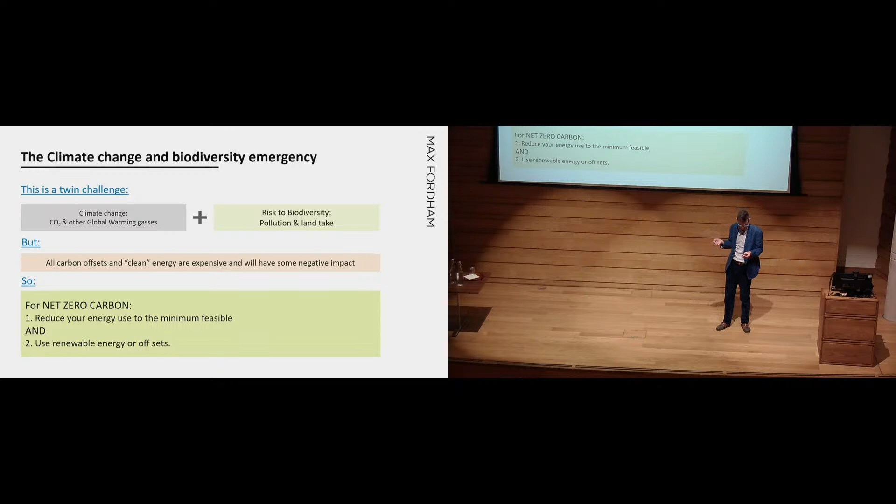So it's very important to think first in terms of a net zero carbon agenda. First of all, you really must reduce your energy usage to the minimum that is feasible, and then use renewable energy or offsets to consume the energy that you need to carry out your business.

So Wolfson's response to the climate change emergency. First of all, let's measure how much energy the buildings are using. We've got the blue bar at the top is how much electricity is being used, and it's a sizable amount, but it's not the biggest.

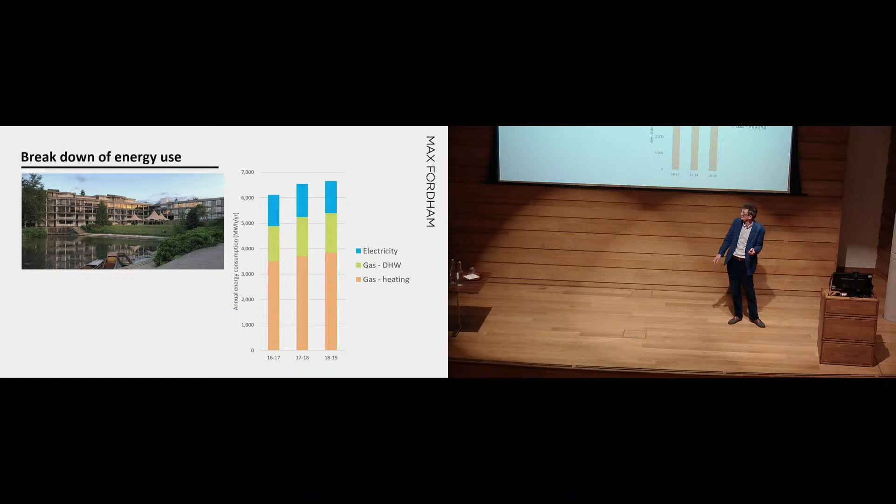The next two bars, two elements of the bars are gas for hot water production, and the grey bar at the bottom, the brown bar at the bottom is heat, which is by far the biggest element. Which is not surprising given that it's basically a glass and concrete, very elegant box.

Now, the carbon context is where carbon and energy interrelate with one another. The units up the side are how many kilograms of carbon are emitted for every kilowatt hour of energy produced.

Gas is a constant due to the chemistry of burning methane, which is CH4, whereas electricity can be made in a variety of ways. In the past, it was used by burning coal. The rapid fall in the carbon intensity on the blue line is the decommissioning of coal-fired power stations.

And going on to 2050, this is the government's projection of how much electricity is going to emit in carbon. And it's reducing due to the onset of more use of renewables and nuclear power and things like that. So you can see that right now, electricity is becoming greener, if you like, than gas. And that's where this is going.

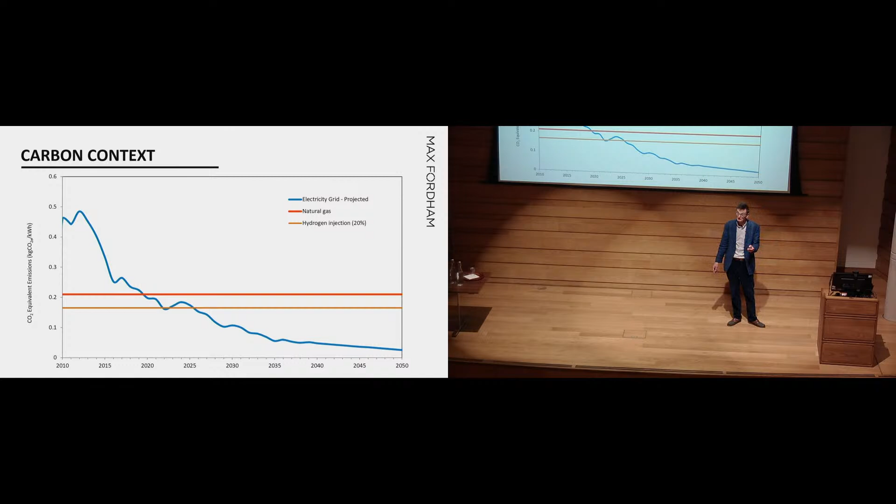This is the agenda we're going for. So our agenda, our brief for Wolfson and for decarbonisation generally, is to reduce heating loads, reducing the hot water loads, that's the water used to wash your hands, if possible, and to move from gas to electricity as your energy source. But this should be done at minimum cost, and to do that, we were looking to reuse as much of the existing infrastructure as possible, so nothing is wasted.

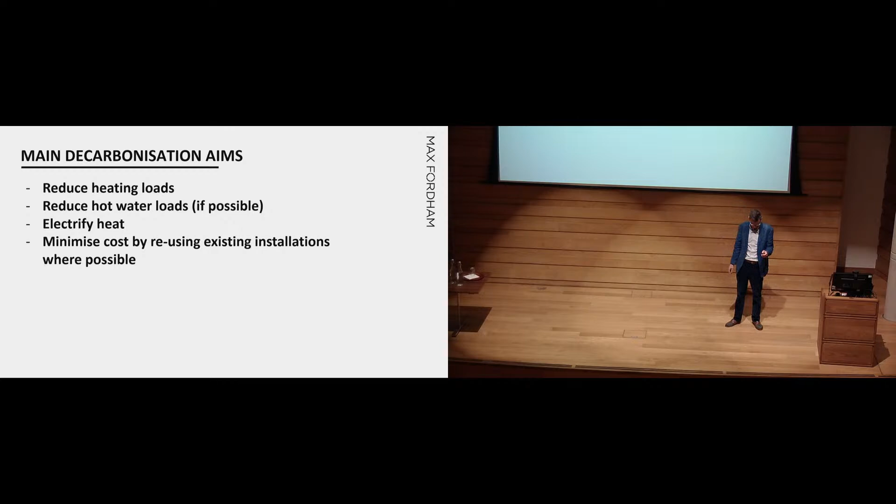So get rid of the gas.

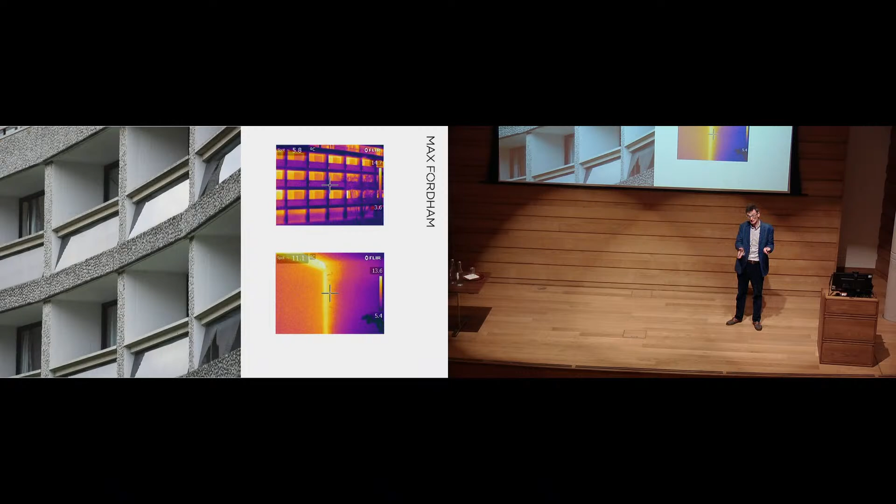That's the before. You've all been in buildings, in rooms which have got single glazed original windows, which are a little bit leaky, and it loses a lot of heat, basically. So I don't need to tell you anything about that. But you're kept warm with a gas supply that burns gas in some boilers.

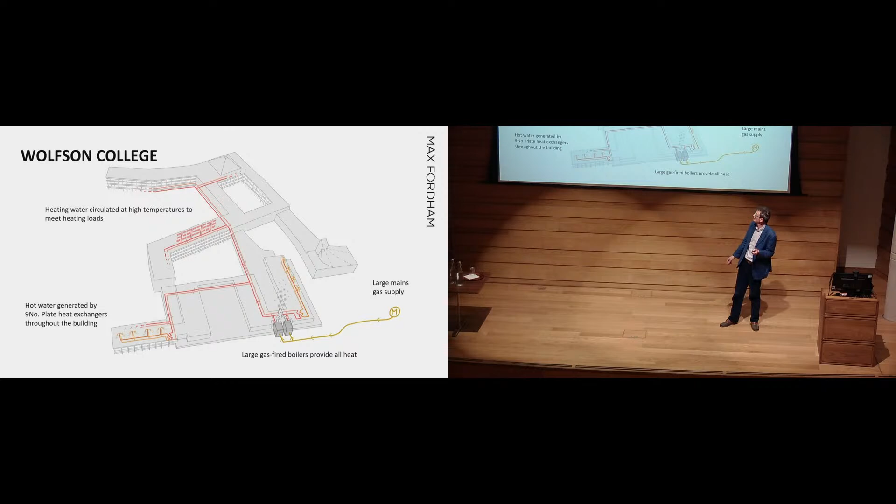Which push hot water around the building and into radiators in all your rooms. So the first step that we took was to analyze where the heat is going to keep you warm. This is assuming that everyone's at a nice temperature in their room. Where does that heat go?

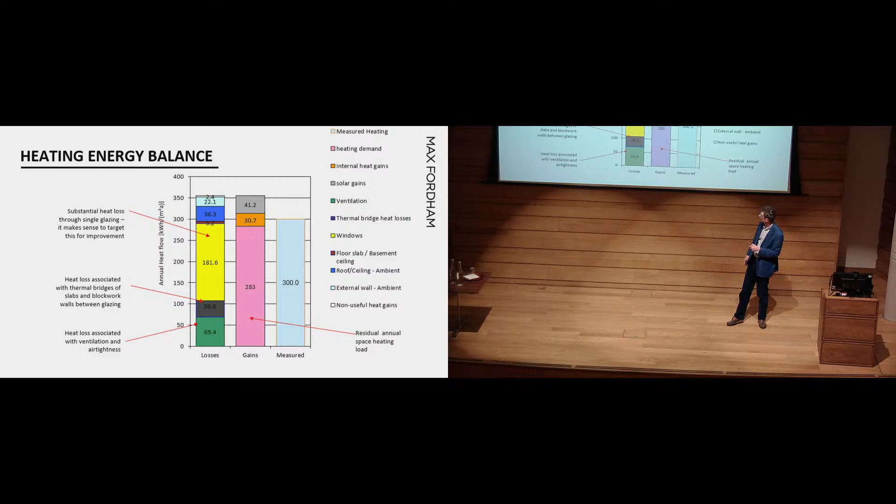The bar here, which is split into several colors, is a breakdown of where that energy goes. The lion's share of it is through the windows themselves, but also the heat loss associated with the windows are also considerable. This is the amount of heat that's lost around the edges of the glazing, through the walls and the concrete on the ceiling and the floor, which isn't necessarily through the window itself, but it's around the edges. And this part is to do with the ventilation because the windows are leaky.

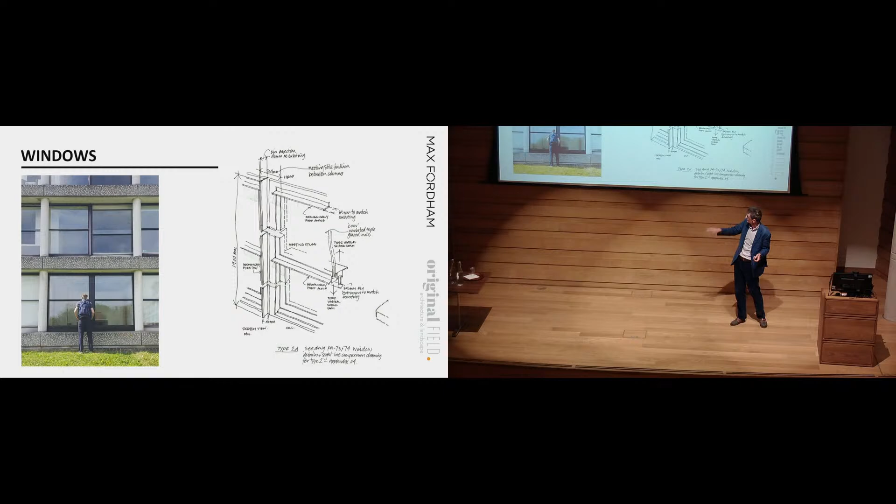Andrew's going to be talking in more detail about how the windows came to be, what the choice of windows that we got at the moment. So that will come on after me. But just a brief outline of what the fabric's about.

This is the current situation where you've got single glazing here, and these are solid blockwork walls here, and you've got a concrete floor here, and heat can not only go through the glass, it can scoot around the edge of the glass and the window frame, and quite a lot of heat is lost through that. So if you're going to change the windows here, you also need to change the frame that it sits in and all the building around it.

So we've insulated the walls coming back to prevent the heat scooting around the edges of our nice new windows.

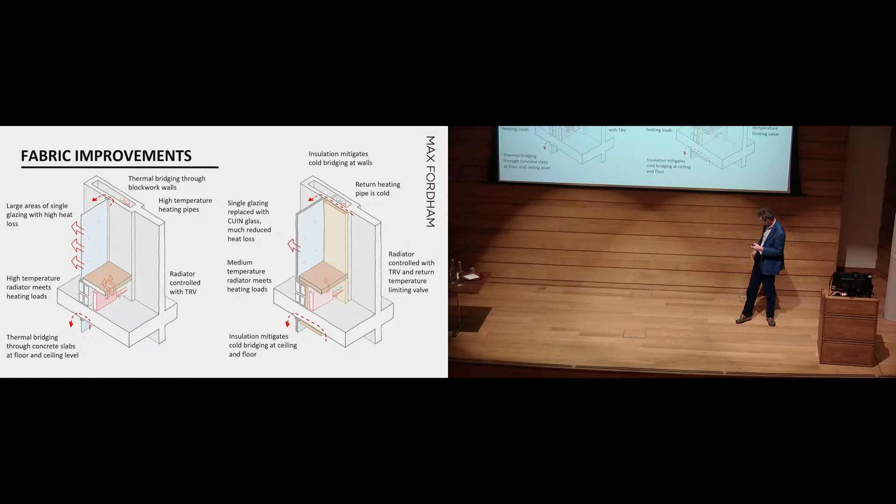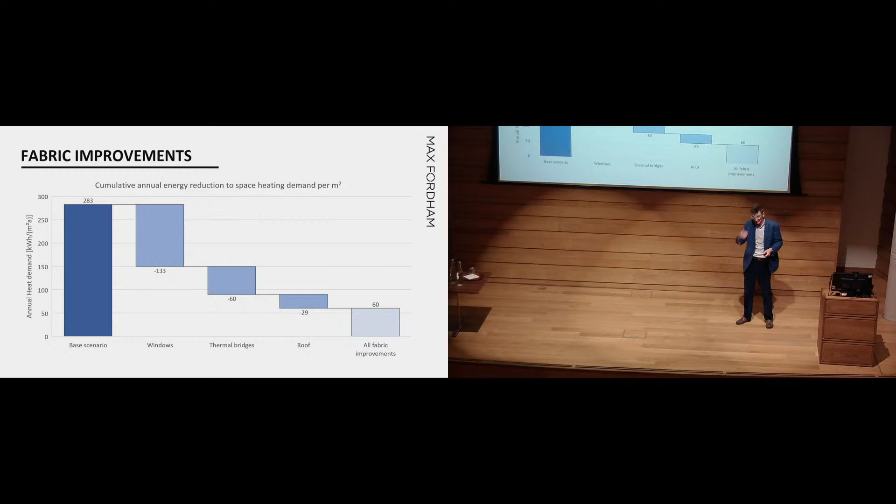This is a cascade, a waterfall diagram of where those heat savings are taking place. The baseline scenario is here, giving us 283 kilowatt hours of heat per meter squared per year. That's what we need to put in to keep the building in its uninsulated state warm. We insulate the windows, and that takes off nearly 50%. Then the thermal bridges, which is the term for going around the edges. And then you've got the roof, which is a bit more, and you've got down to about 20% of the original heat loss. So, very good.

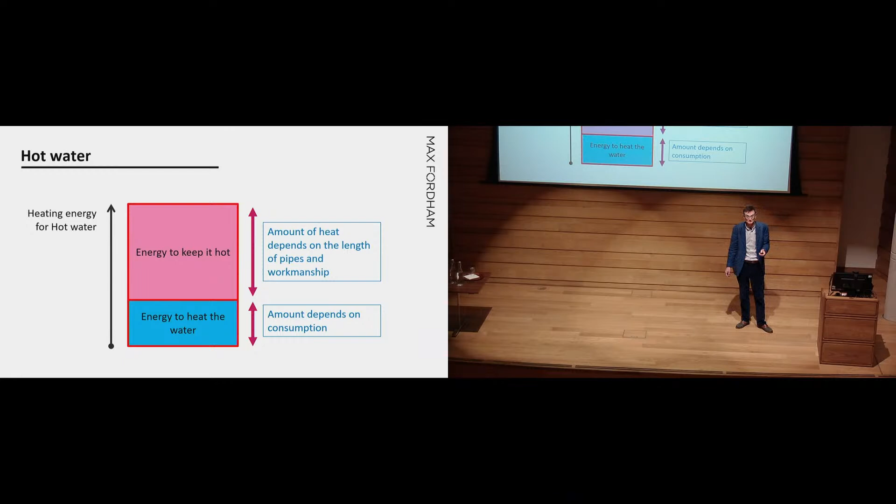As far as the hot water is concerned, it's a different story. It's not so easy to deal with that because of the geography and the layout of the building. The amount of heat that you need to heat the water that comes out of the taps is actually quite a small proportion of the heating required for the hot water. Most of it is used keeping the hot water warm as it's servicing the different taps around the building. And there are things that we can do to reduce that, but it is not as dramatic as the fabric of the main heating load.

So now, moving on away from the fabric and the heat losses and onto how we are producing the heat. Currently, it's using gas. So, as a review of how to deliver a unit of heat, doesn't really matter what that unit is, it's just one unit of heat. You can burn some gas. You would need 1.2 units of gas. 20% of the gas would be wasted, or the heat from it would be wasted up the flue and losses in the boilers and things like that.

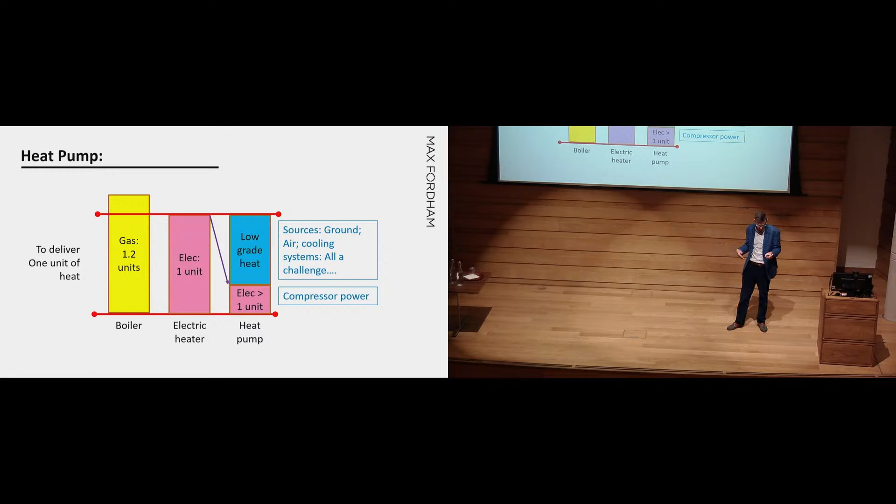You could use an electric fire, and all of the electricity would go into heat. There's no losses. Or you can use a heat pump. Now, a heat pump is a particular technology. It's the same as used in the fridge and things like that, where you take heat from a low temperature source and pump it up to a high temperature where in our case, it's useful. The electricity is needed to drive a compressor, and you need a source of low-grade heat that feeds the heat pump system. That's a quick schematic of what a heat pump looks like.

You've got the electrical power coming in to drive a compressor that takes low temperature, low pressure gas here, compresses it so it's hot. The heat is taken out of that high temperature and pushed around the existing radiator system. It comes round through the condenser, except this isn't a condenser, I'll come on to that. But then it turns into a liquid, low temperature liquid, where it uses low-grade heat to boil off and collect the heat from the low-grade source, and the circuit continues.

This is quite an important aspect of what we're doing at Wolfson. We're using CO2 as the refrigerant, the fluid going around here. CO2, ironically, has a very low global warming potential compared to other refrigerants available. CO2 has a GWP of 1, while other heat pump refrigerants range anything from 600 up to 2,500.

So it is a very green refrigerant. The other aspect is that it doesn't actually condense in the condenser. It comes in as a high-pressure gas, very hot, and leaves as a low-temperature gas. To get the heat out of it, you need to cool it down over a wide temperature difference. So it can produce water at the high temperatures the boiler produces, but to be efficient it needs water coming back at 30 degrees or so. A lot of the work and thinking in this project went into how to do that with the existing heating system.

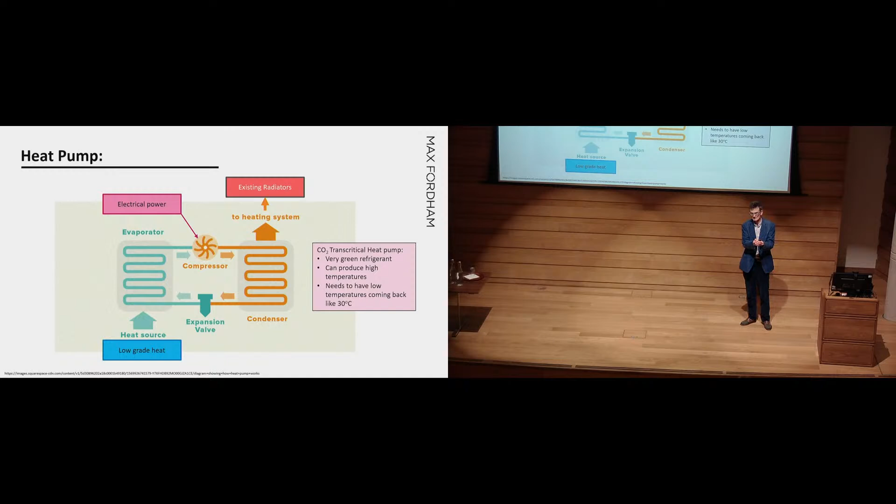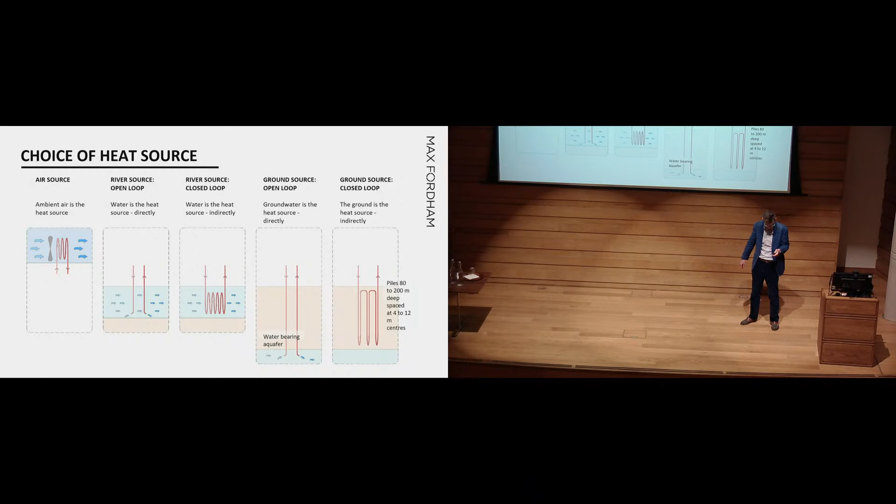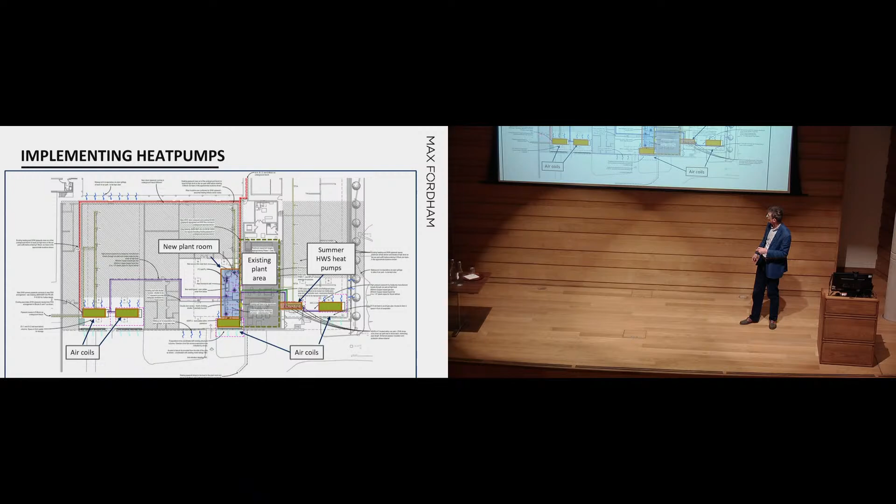So the choice of heat source - I won't dwell on this too long - but the low-grade heat can come from a number of different places. We have chosen to use air coils, which you will see popping up around in the car parks. These take outside air and push it across fins with low temperature refrigerant inside. It cools the air by 2 or 3 degrees and blows it back out in the same direction. So these will be in these positions in the car parks, sucking air in and blowing it out through these grills.

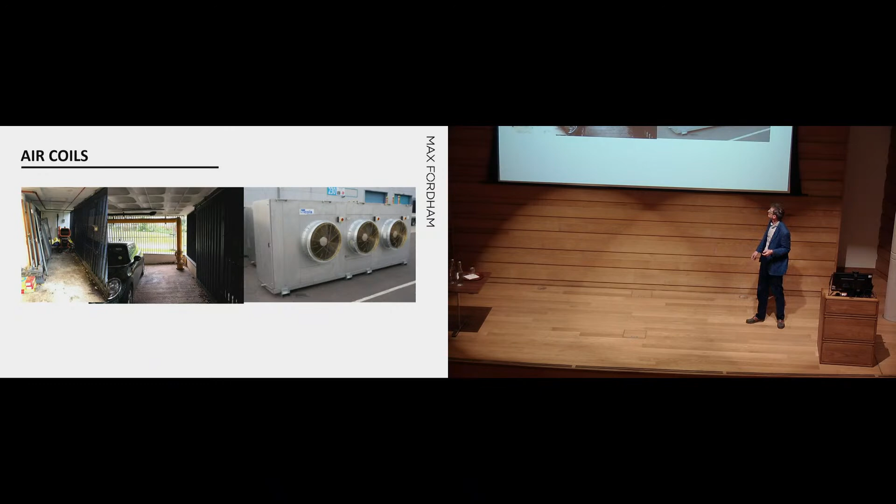So now to the radiators. This is why I spent a bit of time talking about the transcritical CO2 cycle. The existing system - the water from the boilers came in at about 60 degrees through thermostatic radiator valves you could control, and left a bit cooler, but not much cooler. The average temperature of the radiator was about 58 degrees at peak conditions.

Now, in preparation for operating with the CO2 heat pump and the transcritical cycle, we have put temperature limiting valves here to limit the temperature of the water coming off the radiator. So now they've all been set to about 40 degrees. We still have a thermostatic radiator valve here, which will adjust the temperature of the water coming in. We can get water quite hot coming into the radiator, and with this temperature drop between 75 and 40, you can still have an average radiator temperature of 58 - the same as before - but achieved with a much bigger temperature drop across the radiator.

Now, that's fine in the old condition, but in the new condition, after you've insulated your room, you need a much lower average temperature. So you'd still have the water coming in at quite a hot temperature, but it will be going off at a much lower temperature, which is appropriate for our heat pump and makes it very efficient.

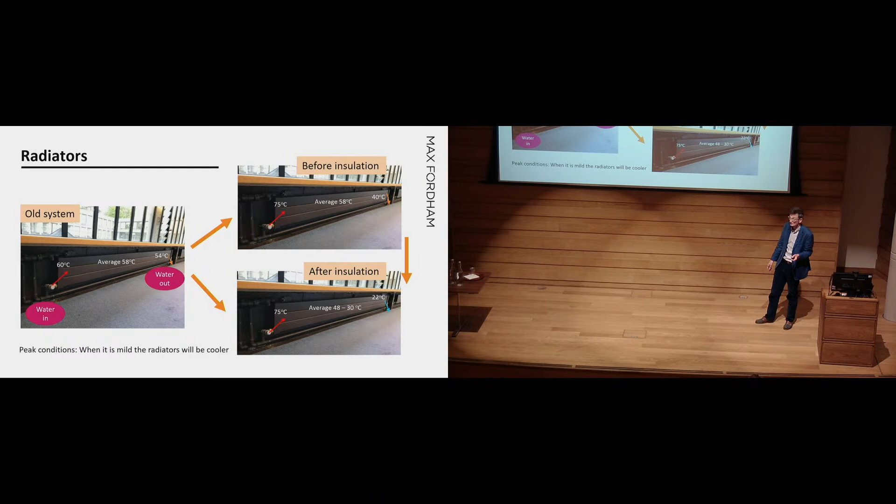Basically, the less heat loss your room will have, the lower we will set this - somewhere between 25 and 30 degrees return. What I'd like to reiterate here is: better insulation means less heat loss. Less heat loss means you need less heat coming out of the radiator. So if you're warm and the radiator is cool, it's working. And you should pat us all on the back because we've achieved something.

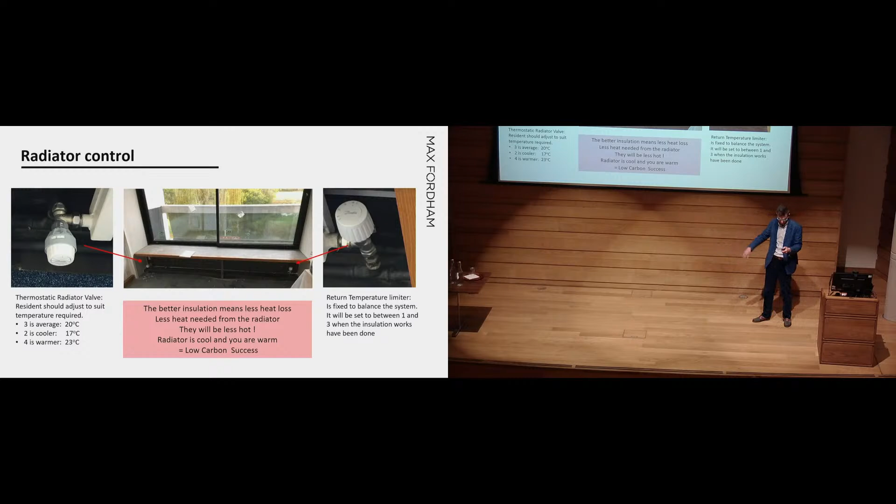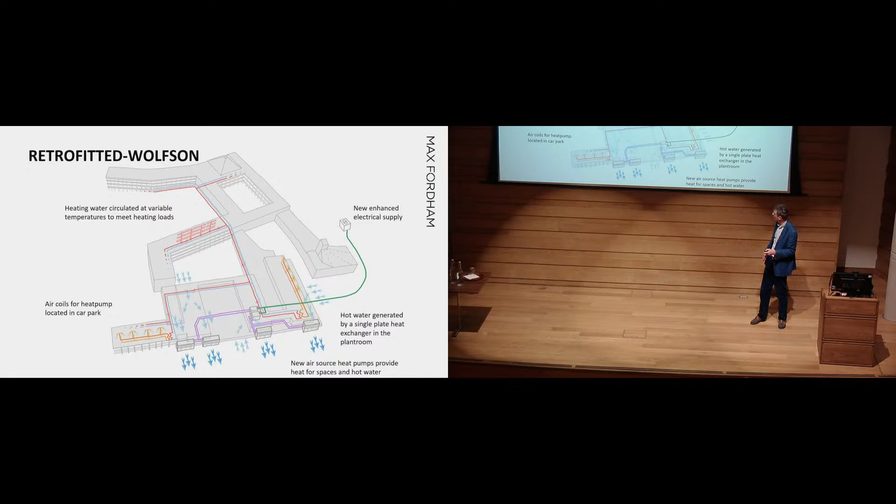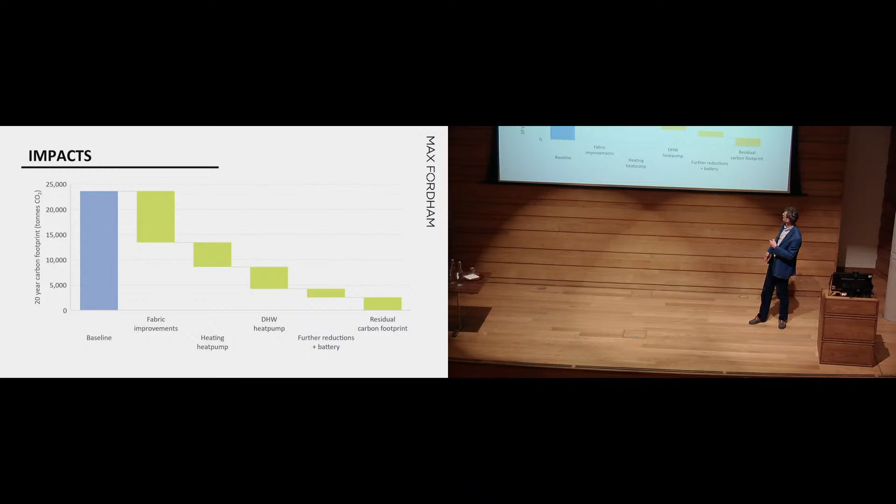And the overall impact on the carbon - here's another waterfall diagram, the fabric - and this is over 20 years: the reduction in carbon from our business as usual falls away like this, with our residual footprint here.

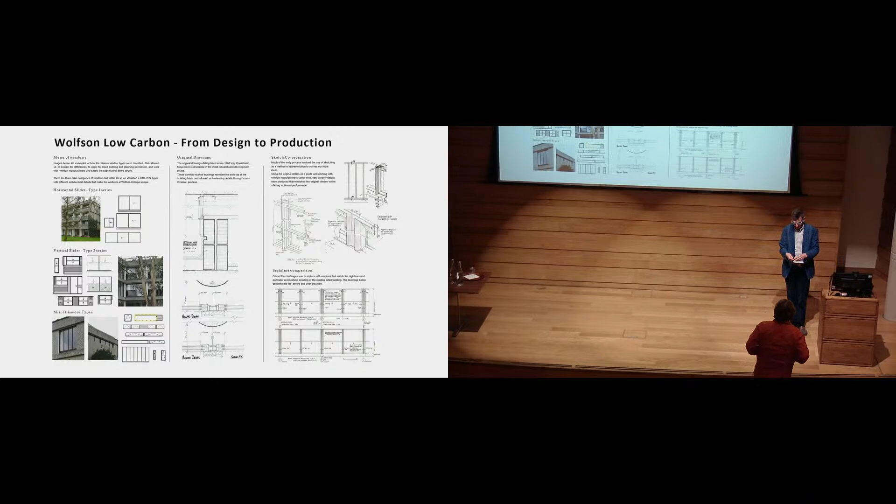Hello, my name's Andrew Dawson from Original Field, and in the front row is my colleague Marion Brereton. Marion has been an architect working at Wolfson for many years and is the author of this fine building we're in now. Bill has set up the parameters for the building science, and with him we developed a set of performance criteria that we had to respond to.

Glass performance, airtight quality around windows and so forth. That was fine, but our biggest challenge was the buildings are grade 2 listed, and as a consequence of that, any alterations to the existing building fabric requires approval, the relevant approvals in place.

In doing that, we needed to consult various regulatory bodies, including Historic England and the 20th Century Society. The 20th Century Society are the custodians of Britain's 20th century buildings. And when we met them on site, they were not particularly happy about altering any part of the buildings.

In doing that, we had to establish what we were going to do to the buildings within Bill's framework of responding to the building science, but also with a deep understanding of what the existing buildings were. So at the beginning, we had to go through a process of understanding what the windows were, because the windows were the main element that we were affecting.

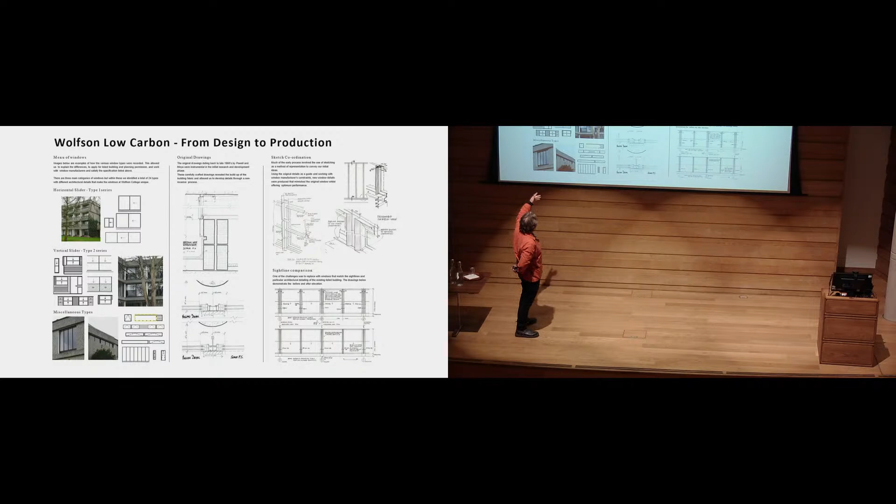And in the beginning, we set up this menu of windows, and you can see at the top we had type 1 windows, which are the horizontal sliders. Most of you are familiar with those in the bedrooms. And then the type 2s are the vertical sliders, which you see on the north elevations of B and C block. And then we have miscellaneous types all over the complex of buildings.

It is quite complex in terms of the number of windows, the types of windows, the various junctions and so forth that happen as a consequence of the windows.

So we were quite fortunate. The college has quite a good archive of original drawings, and these are examples of details that we had. These details allowed us to gain a thorough understanding of the junctions and the relationship between different elements and so forth.

One of the problems is that as we improved the thermal performance of the window, we had to look at the specification of the window, and that did have an impact on what the size of the window is, the position of the window, the width of the sight line or the loss of the sight line that we had to have for the centre mullions.

So this was all part of the negotiation of trying to satisfy the requirements that Bill set out at the beginning of the project, and also appeasing the planners and the conservation officer. And they were interested in everything from the colour through to the relationship with the existing building.

The mullion thickness was a big one that we had to go through. And they did make us revisit a number of windows, and not the main windows, but mainly the horizontal windows here. As we progressed through it, we started to look at the sketch design.

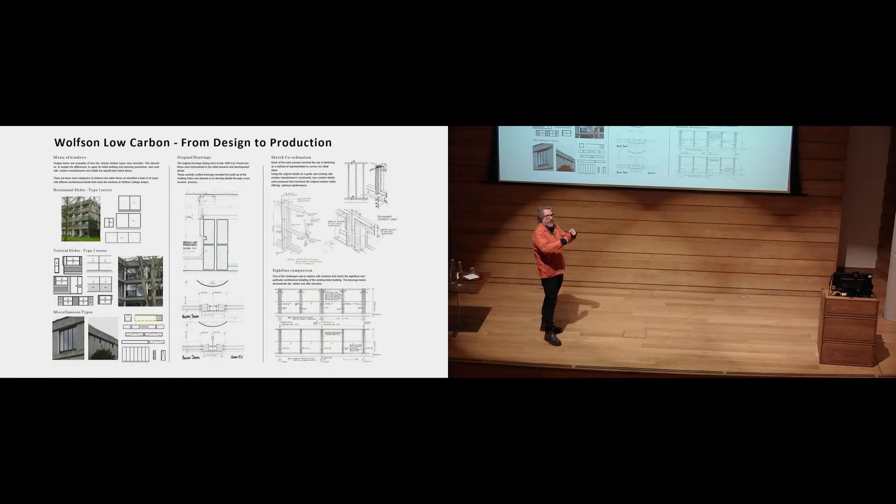We started to think about, we had to start looking at what windows we could use, the mullions, the glass and so forth, and thickness. So there was this sort of iterative series of steps that we went through to proceed with the design development.

And all along the way, we were working with Bill, and Bill was keeping us in check in terms of the detailing. We got to the point where we had to do technical development, and this was still before, or just before we went to planning and listed building consent.

So we have to resolve a high level of detail, and you can start to see here, this is a cross-section through a window, and you can see what Bill referred to earlier as this sort of portal surround around your windows in your main bedrooms.

And we started to then, once we've got listed building consent, we had to then move into the next stage, which was production and fabrication drawings. So each element within the windows, and the windows being the main production element, had to be drawn with a level of precision that then they could be fabricated within a factory.

At this stage, we started working and collaborating with some collaborators. We were working with Fenster - you'd have seen these guys around the campus and their signs. Fenster are a glazing fabricator and installer. Benfield and Loxley were the builders - they built the auditorium here and have been working on campus for many years. And Alden are the incumbent mechanical and heating engineers on the campus.

So once we'd done all the fabricated drawings, we then went into production and then the installation process.

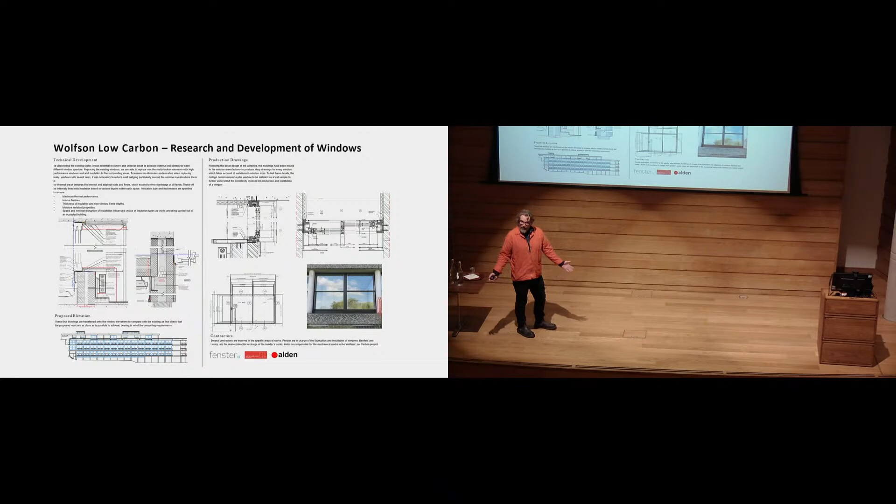That's about it. I could talk more, but I'm sure there'll be lots of questions.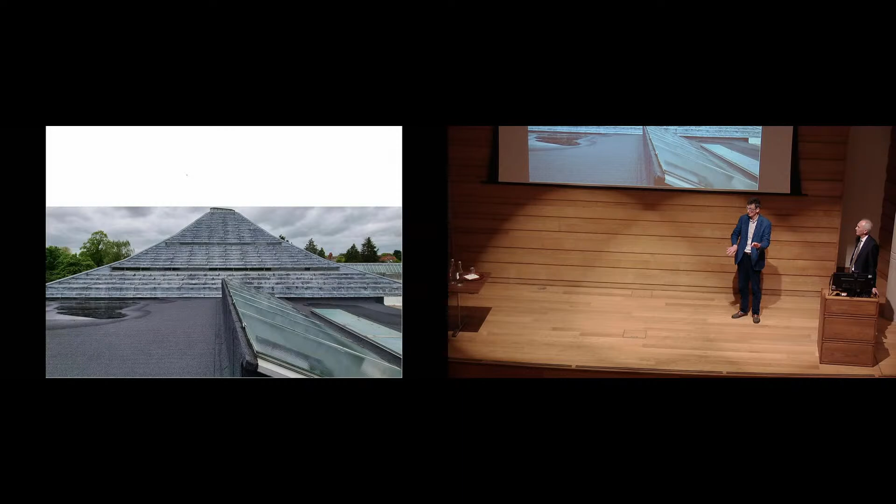You're able to completely retrofit it to the current framework? Yes, yes. I mean, it has to be said, I don't know if you noticed, but the boiler - where the heat pump's going to go is separate from the boiler room. So the boilers can be left there indefinitely if you want to. We can parallel run for whatever period of time, or we can just turn a valve and shut them off. That's how it's going.

That shouldn't be apparent to anybody as it happens, but there are going to be little bits of changeovers here and there which will be apparent. But at the time, you shouldn't notice a difference between working on a heat pump or a boiler. It could be because all this preparatory work is with the boilers in place to get the system up and running so that it can be dealt with by the heat pump, hence all the radiator and the valves and all that sort of stuff.

Most of the equipment has been ordered, and yeah, we've had no indication of any problems with the supply chain. However, I think we've always got to be prepared that there are things happening out there that are beyond our control. It's been amazing how well this project has gone, given everything. Anyway, sorry, just was...

Andrew, can I ask a question of you, which is, in some ways you were designing windows based upon some plans from 50 years ago. When you actually got rid of the old windows and the old surrounds, was it exactly as you expected, or were there some surprises?

When you look at the existing windows, they're incredibly fine. You can see this slideshow showing them, and architects love that fineness. As soon as it starts getting chunky, that's when anxiety sets in.

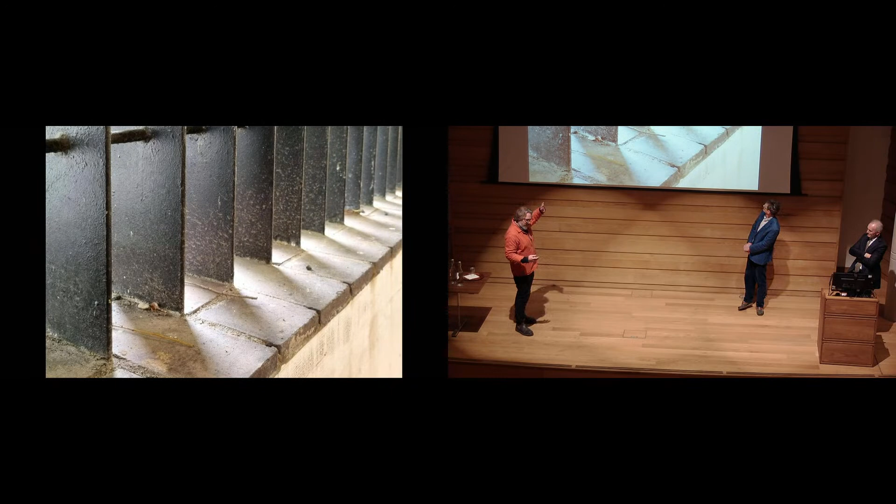I'll just repeat that since we didn't pick it up on the mic. Marion's saying we've used a relatively standard kit of parts for the windows - off the shelf - but put the components together to achieve precisely what the original windows were. It's a totally bespoke system, and we've been fabricating aluminium profiles to match the existing profiles. We've had to negotiate changes within the industry, but I think the outcome is very good. You can see for yourself when you look at Block E.

Can I ask a linked question - if you're a college with 16th century windows and buildings, will they find anything in what we've done to help them, or is theirs a completely different kind of project? We've gone on this journey of looking at glass, for example, and we're using Kuhn glass, which is triple glazed.

However, it's only 2 panes of glass with a film in the middle, just 1 millimetre thick. I think there's going to be significant advancements in technology, particularly around glass performance. Bill's favourite is vacuum glass, which is incredibly thin - I can see that evolving into replacing glass panels in older buildings, and you can get it down to about 6 mil. If you can get it to 4 mil, that would be fantastic. So it's going to evolve quickly in the next 10 years in terms of materials available for these situations.

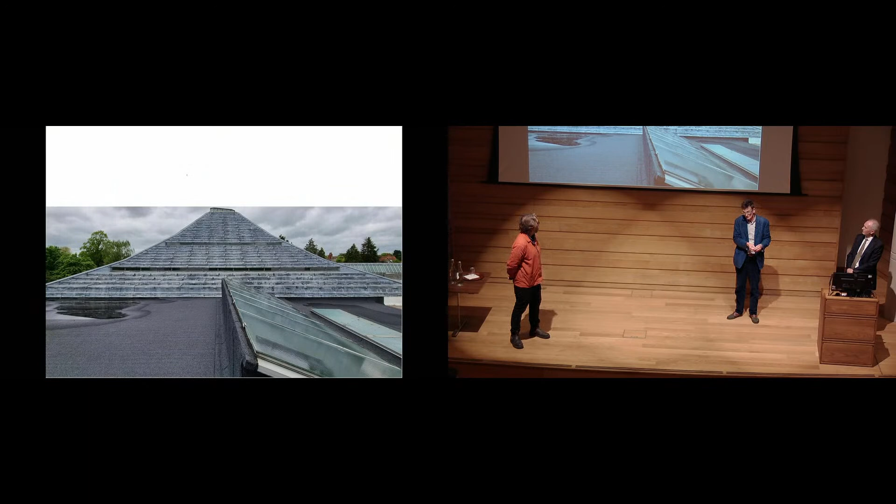The solar thermal stuff - in a way, solar thermal is one of those ideas that sounds good, but actually is tricky. My view is that if we've got solar PVs on the roof, we can use that energy in the heat pump to produce heat at the same sort of efficiency with a 2-to-1 ratio. So I don't see that as being a problem. Electricity is much more fungible as a resource than hot water.

There's a subtlety to this that I'll introduce. The losses associated with circulating water around the building do need to be treated at a high temperature. We're generating the water centrally and circulating it around the building, and it needs to be reheated when it comes back to the plant room. So it goes out at something like 55 and comes back at 50, and we have to heat it up from 50 to 55.

When we're heating, we use some of the heat from the CO2 heat pump to provide that reheat. But in the summer, when we don't have a space heating requirement, we achieve that reheat with a separate set of heat pumps, which do work efficiently at 55 degrees centigrade. So that's a subtlety. Okay, maybe one last question.